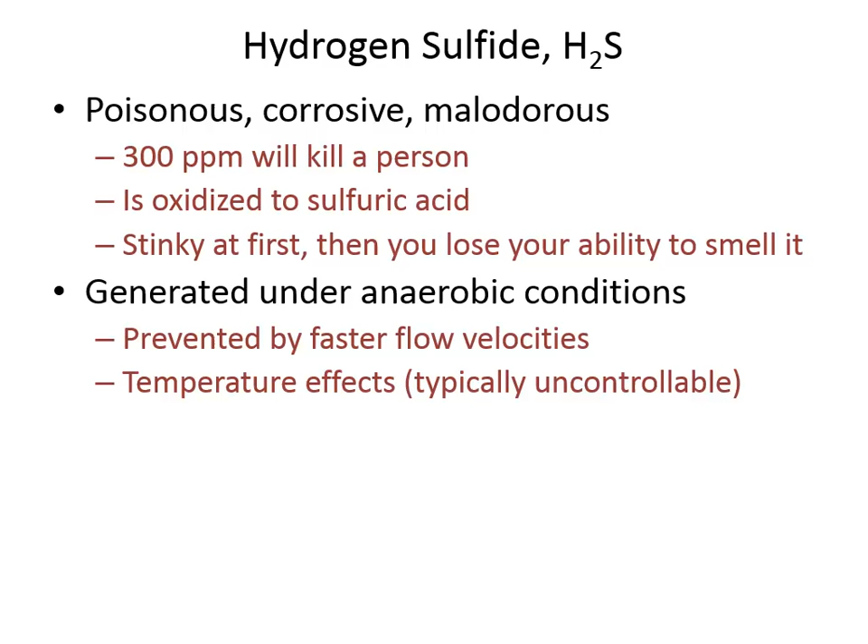People who work in enclosed spaces often have to carry little monitors that will alert them against hydrogen sulfide, but from the hydraulic design standpoint, we want to ensure minimum velocities to help prevent BOD, which is the waste in wastewater, from being converted into hydrogen sulfide. This is an empirical equation that allows you to estimate how much potential for generating hydrogen sulfide there is based on the concentration of waste in the water, and hydraulic parameters like the flow rate, the slope of the channel, and the wetted perimeter to the top width.

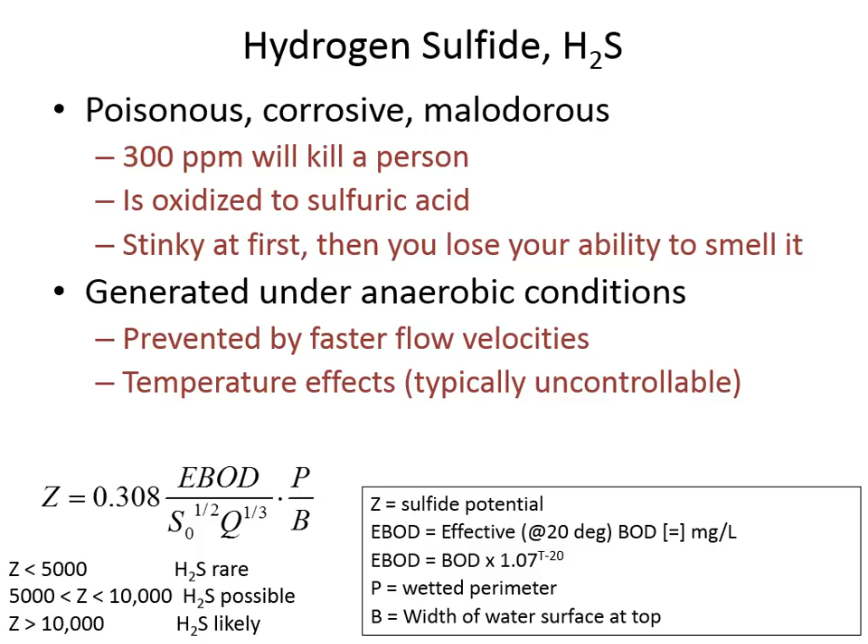According to this empirical model, if you calculate a Z value less than 5,000, then probably hydrogen sulfide won't be formed. At 10,000, it probably will be formed, and there's a middle ground where it's possible, and you just have to be looking out for it. So here's an example that works through both the partially full sewer and the impact of having BOD in there. We'll go through this one quickly so we can save most of the time for channel design.

In this example, we have a pipe diameter of 750 millimeters, and the water has a temperature of 33 degrees Celsius. We care about that for more than just the fluid properties, because the warmer the water is, the more easily bacteria break down BOD and sulfur into hydrogen sulfide. So the temperature is 33 degrees Celsius, and we'll use that in calculating the effective BOD.

The slope, we're told, is 0.8%. And the n value is 0.013; this is a concrete pipe. The slope is 0.008, 0.8 divided by 100. Now, our equation for a partially full pipe says theta to the negative 2/3 power times (theta minus sine of theta) to the 5/3 power, minus 20.16 times n, Q, diameter to the negative 8/3, slope to the negative 1/2 power is equal to 0.

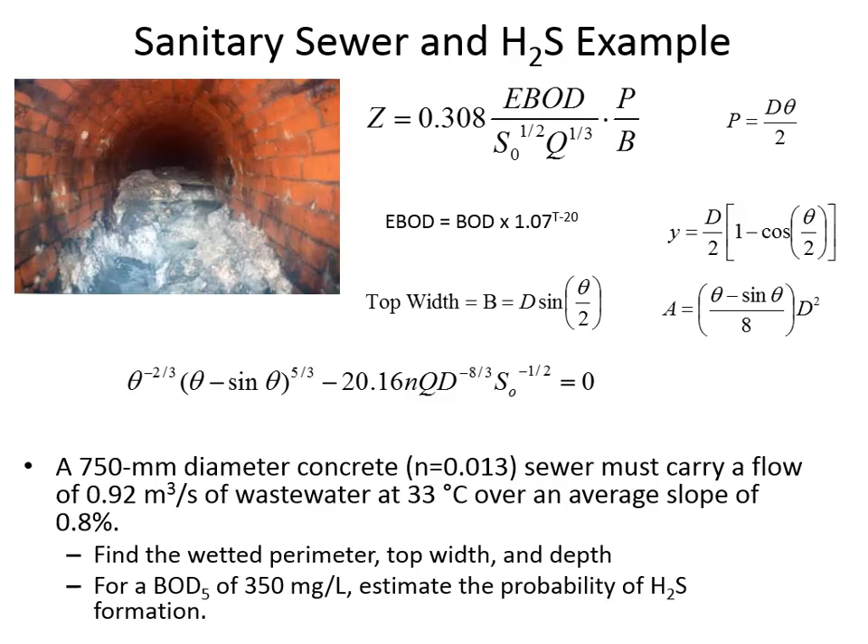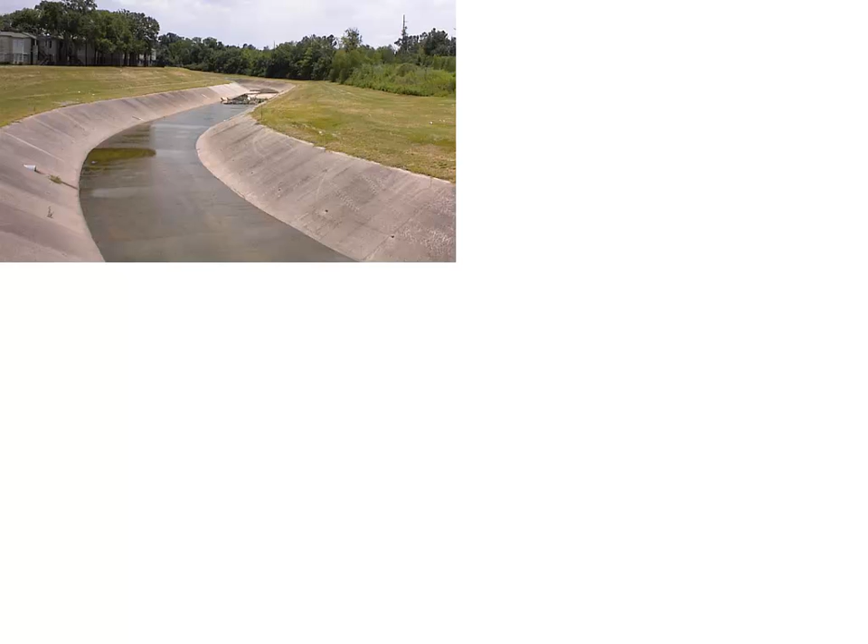All right, well, let's talk about channel design and not probability and risk. I actually took out the probability and risk part of this semester and I put it into hydrology. So in channel design, we'll mostly be, as engineers, sizing lined channels.

Here's a concrete lined channel. You can see it's trapezoidal. This one happens to be meandering in shape. And there's a nice grassy right-of-way on either side of the channel. Those are often put there so that someone could drive along the channel and inspect it, trying to look for any cracks in the concrete or looking for the growth of weeds, because if weeds grow, then they can reduce the hydraulic capacity. So inspection is an important thing, but trying to optimize the capacity of that channel is a big part of what a hydraulic designer would do.

You're trying to balance how expensive it is to excavate, because excavating material and hauling it away is going to cost money. But if you don't go down, then you have to make the channel wider. And of course, you'll notice that this has neighbors in the backyard here. You have to buy land if you make the channel very wide. And so engineering is always about optimizing and balancing costs. And that comes into play with open channel design as well.

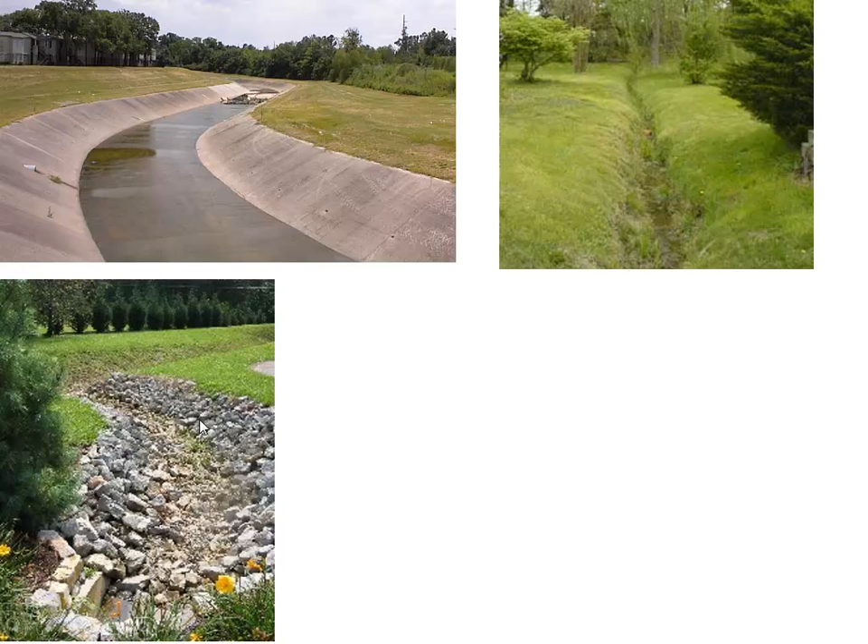Here's an unlined channel. This looks like it's just sort of a ditch in someone's backyard that's formed. It's going to have a much higher n value because of the irregularity of the channel and also because of the grass that's growing in there. Here's a channel that is lined with rocks to try and prevent scour and erosion. This is actually the outfall of a culvert, and it goes around this bend and then enters a grass-lined channel

around that way. And then here they're doing construction on what ultimately will become a plastic-lined channel. This is going to have compacted clay, and then they put down what's called a geomembrane, or a thick layer of plastic to try and prevent water from being lost.

But in constructed channel design, we're trying to consider the slope that's available. You're moving water over the surface from one place to another. Probably the one factor that affects the capacity of the channel more than anything else is how steep it is. And you can't really make the channel any steeper than the slope of the ground. You can make it less steep by meandering back and forth. You can't make it any steeper, otherwise your channel starts to go down underground.

You're trying to balance the effect of the channel geometry on the velocities that can be seen. And velocity is important in the case of hydraulic design of an open channel, because if you have it too fast, then it will scour the bed. And sometimes these are made out of clay and earth, and you want to avoid the scour of the bed. But if it's too low, then sediment may drop out of the flow and start to line the bottom of the channel, or weeds can form.

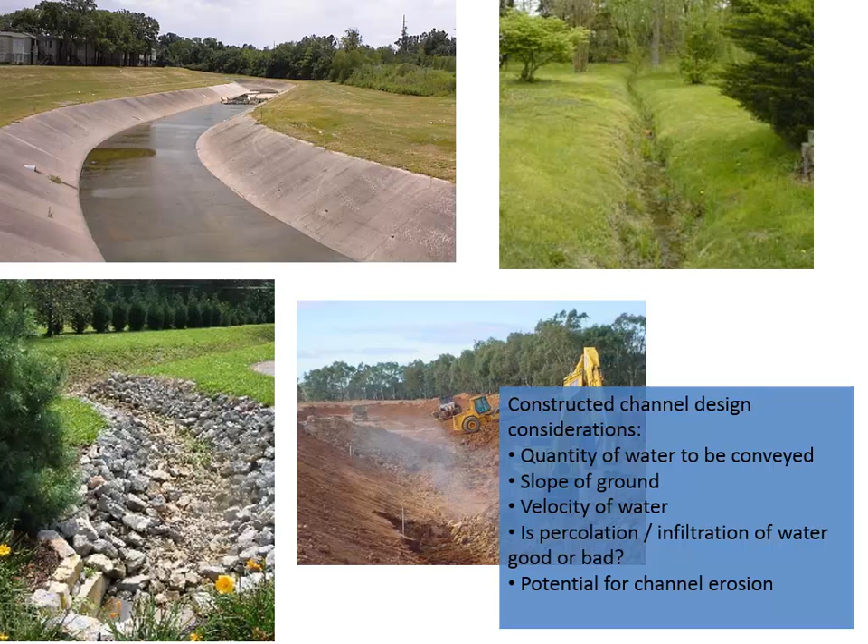But in other cases, like in Arizona, where they have a 100+ mile channel that takes water from the mountains into Phoenix, infiltration is really a big problem. They don't want water seeping from their channel. They want as much of it to be conveyed to the city as possible. So we'll step through some of these considerations.

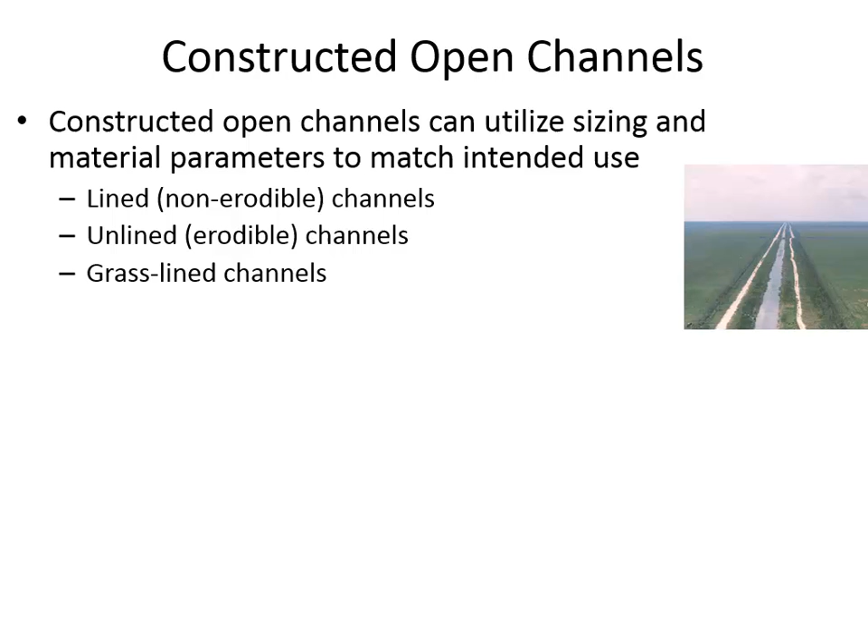And in open channels, we can have lined, unlined, and grass-lined channels. By lined, we usually mean with concrete, or sometimes paved with asphalt. For erodible channels, most commonly what we're working with is a clay, a compacted clay, and a grass-lined channel is kind of in between. It provides some resistance against scour, but ultimately not as much as a lined channel would.

We've already talked about the sections that are the most hydraulically effective, those that can maximize the amount of water that flows through them while minimizing flow area. Because by minimizing flow area, you're reducing the amount that has to be excavated and hauled away, and you're also reducing the amount of liner that has to be installed.

Yep, that's Florida. Yeah. They've got a lot of really long, straight canals down there to help drain swamps and increase the availability to develop land.

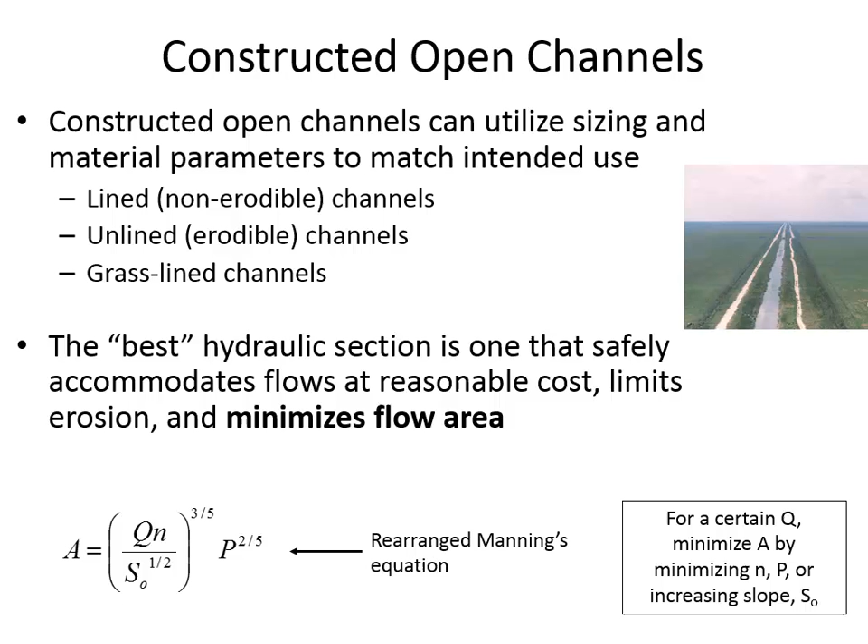26 miles, yeah, that's long. I bet it was hot too, right? Oh, okay. Well, I don't feel so bad for you then.

There's something called superelevation. If you had a tight radius curve, like this is our trapezoidal cross section, and the water is going around a bend like this, then the surface may actually be tilted like that as it goes around the bend. If the velocities are high, it's going to be more pronounced than if the velocities are low. One of the reasons you put a little extra height above where you expect the water surface to be is for superelevation around a curve.

It may be because of splashing. It could be that there's going to be a hydraulic jump in the channel with a lot of vigorous mixing, and so freeboard considerations take that into account.

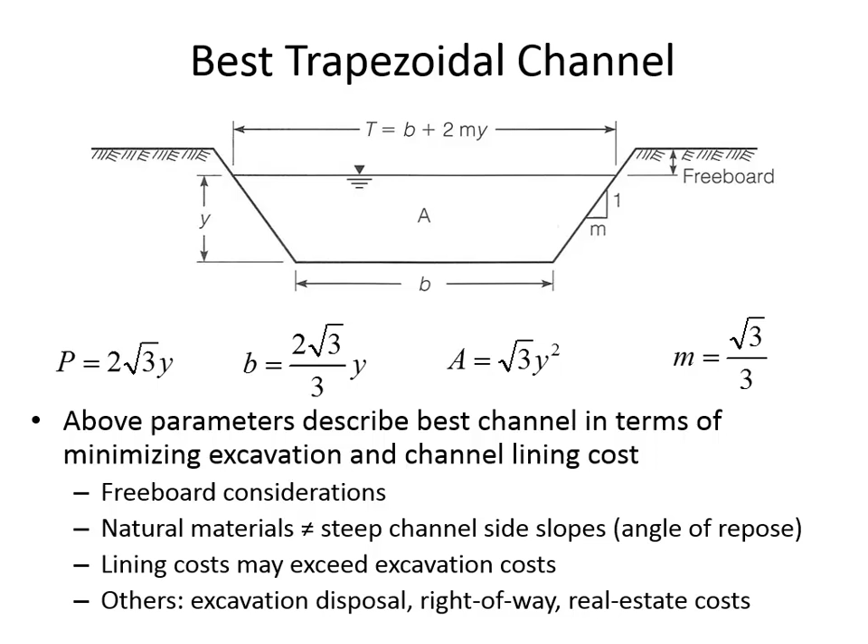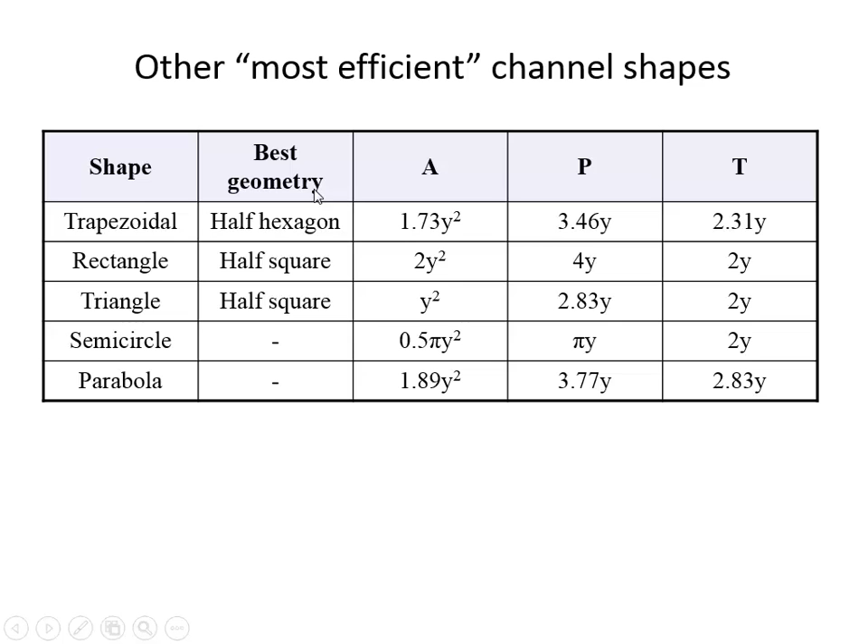So freeboard varies based on the quantity of water you expect to carry, and also the width of the channel is going to affect the superelevation. But here are some of the geometric parameters for what's considered the best geometry, best in terms of minimizing the flow area, A, based on a certain depth, Y.

Now, there's a couple of different slopes. We talk about the side slopes, and we've already talked about how the side slope factors into calculating the cross-sectional area. But how steep you can go with a side slope depends on what the channel is going to be made out of.

If you're going to have a channel built out of rock, then you could actually have a vertical side slope. You can get away with the rectangular channel that we're always using in our calculations just because it's numerically easier. You wouldn't be able to get away with a rectangular channel if you're digging into sand, right? A sand channel isn't going to have this sharp edge, but you could if you had concrete or rock. So the side slopes you select are governed by how cohesive the material is.

The longitudinal slopes are just governed by the surrounding geography. If you're in a flat area, your longitudinal slopes are going to be relatively mild, like that picture of Florida. Florida is not a very hilly state, so their channels are very, very flat. Steep slopes may cause channel erosion, and that can be prevented with meandering. If you have a hill, the channel can wind back and forth, and by doing so you have a more moderate slope than if you went straight down.

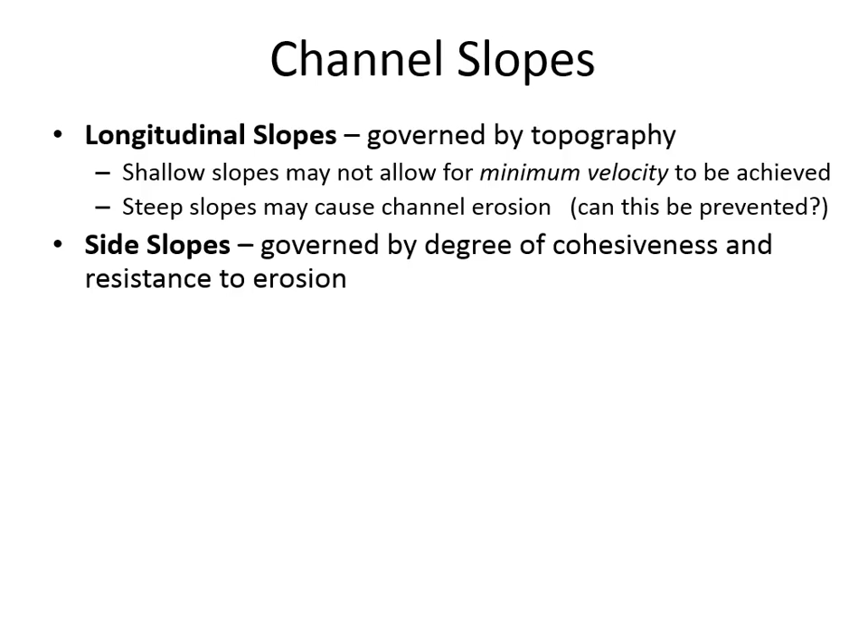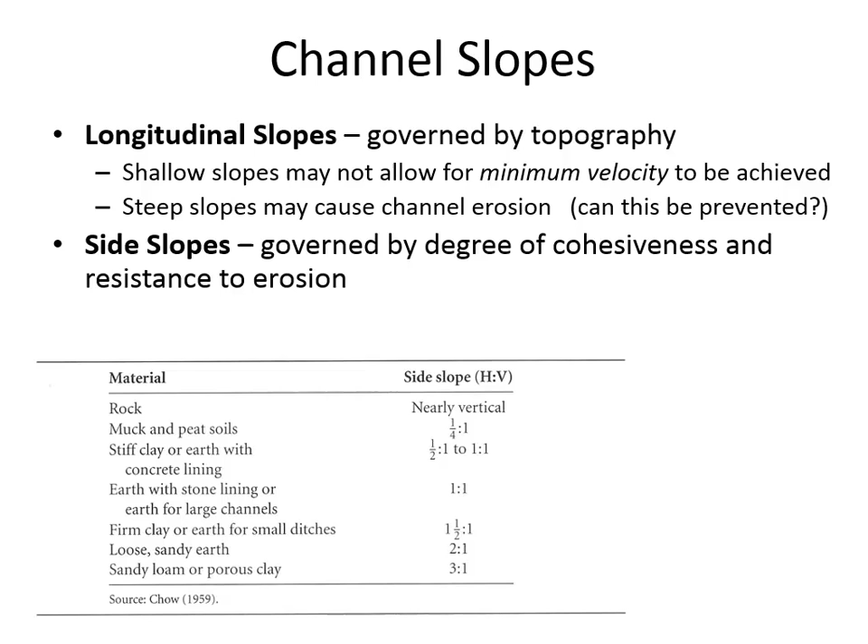Here are some typical side slopes that can be tolerated in a variety of different materials. You'll notice that if you've got sandy materials, maybe the best you can do is a 3-to-1 side slope, whereas with rock, you may be able to have a vertical side slope. And there's a variety of side slopes in between depending on the material being used.

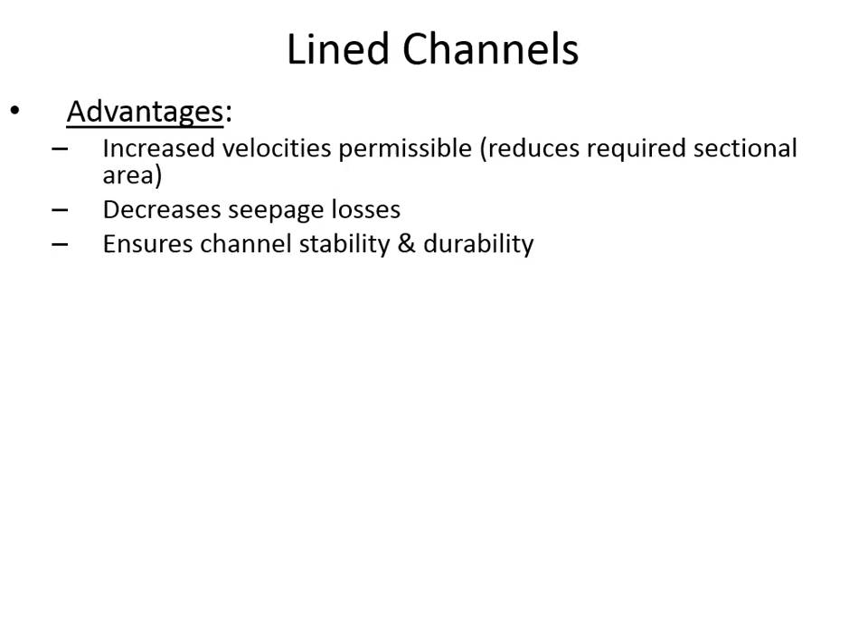If water's going down the mountain in a straight line path, you're going to have to line the channel with concrete to try and make it more resistant to scour because the velocities are going to be very high. Another advantage of using a lined channel is that generally that decreases the amount of lost water due to seepage. So if water is considered a precious resource and you don't want to lose it, then a lined channel enables you to avoid that. On the other hand, the unlined channel is good if you're using water as a waste. If you're trying to get rid of storm water, then an unlined channel is better from that perspective.

To design a lined channel, you first start off with selecting the material and the flow rate that has to be carried. Selecting the material is often just a function of talking to the material resource providers in the area, the people who provide concrete, or it might be that you have access to a geosynthetic liner, like a plastic liner that could go on top of a clay section. And then you find the n value for that material.

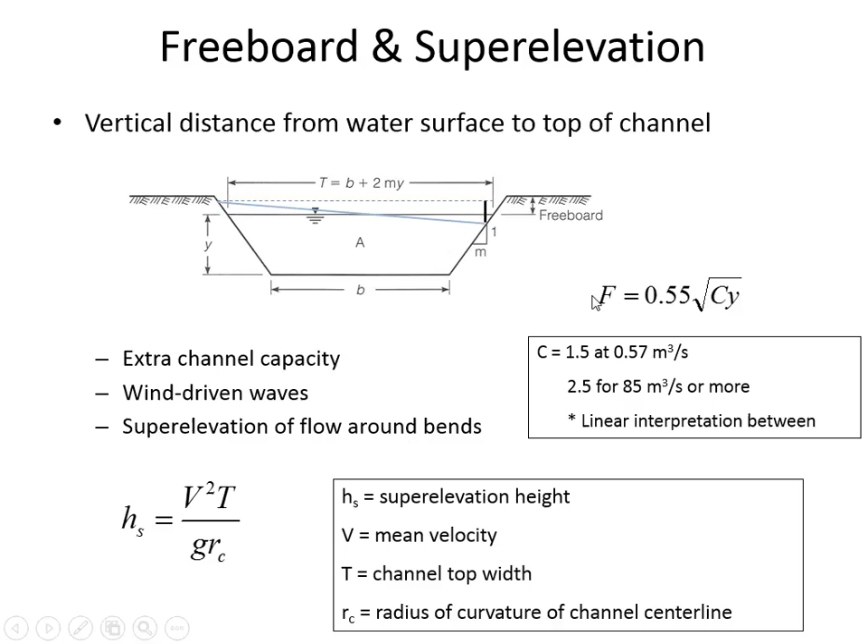The flow rate to be carried would be given to you by the hydrologist, saying what the flow rate is coming out of a canyon where you're trying to convey the water from place to place, or it might be that you're conveying water to a water treatment plant, in which case the flow rate is maybe dictated by the demands of the water treatment plant. The n value is related to the material. The freeboard coefficient would be selected based on this interpolation and the calculation for how much extra capacity over and above the water surface for freeboard.

Computing normal depth of flow from Manning's equation is how we find the depth. And then you check the velocity and the Froude number. And the reason why is that typically you want to avoid supercritical flow if you can, because it's prone to scour, and if you get supercritical flow at a certain section, then it's going to have to go through a hydraulic jump when it transitions to subcritical flow. So you want to avoid supercritical flow.

Even though hydraulic jumps are fun to look at, they can be a little bit unpredictable and risky if you have one and you don't know exactly where the jump is going to set up, and you're not prepared for it. It can cause problems.

The rule of thumb is that if you've got a non-reinforced lining, you want to have the flow rate under 2.1 meters per second. So non-reinforced would mean like if you have concrete, but it's not heavily armored concrete. But if you have a channel that is going to have really high velocities, you can have up to 5.5 meters per second if you've got a reinforced lining.

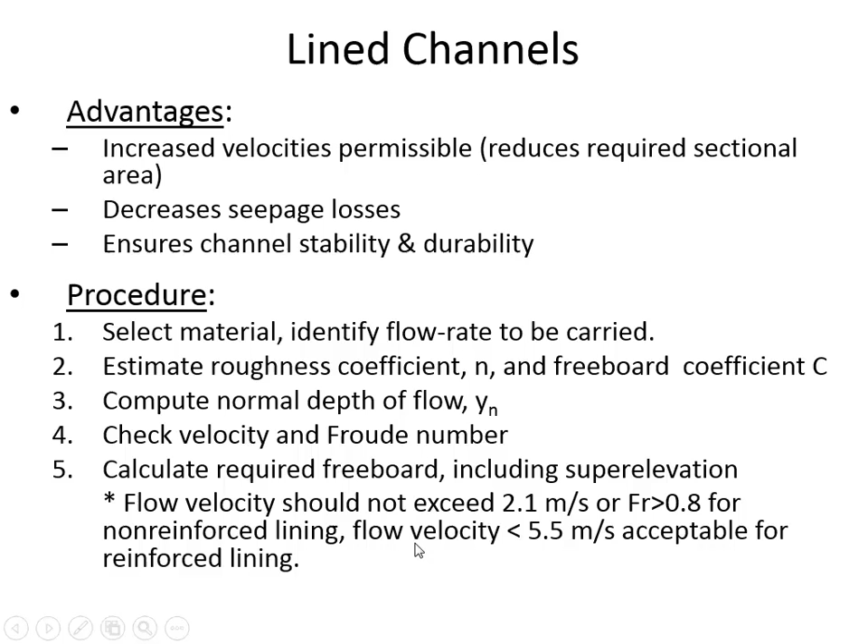All right, so here's an example that takes us through the process of designing a reinforced concrete trapezoidal channel.

Is there an extra copy of the notes? Got 15 minutes, and I want to leave you about 7 to do the teaching evaluations, so I think we'll be okay.

Okay, we're going to design a lined channel here to carry 2.4 cubic meters per second. So first of all, step 1, we're going to use concrete. And the n value of this concrete, let's just say we're going to pick in the middle of the typical values for its roughness. 0.015 would be a little bit more rough than the standard 0.013 that we sometimes select. We know that the flow rate to be carried is 2.4 cubic meters per second, and the channel slope is 0.005 in this example, so 0.5% slope.

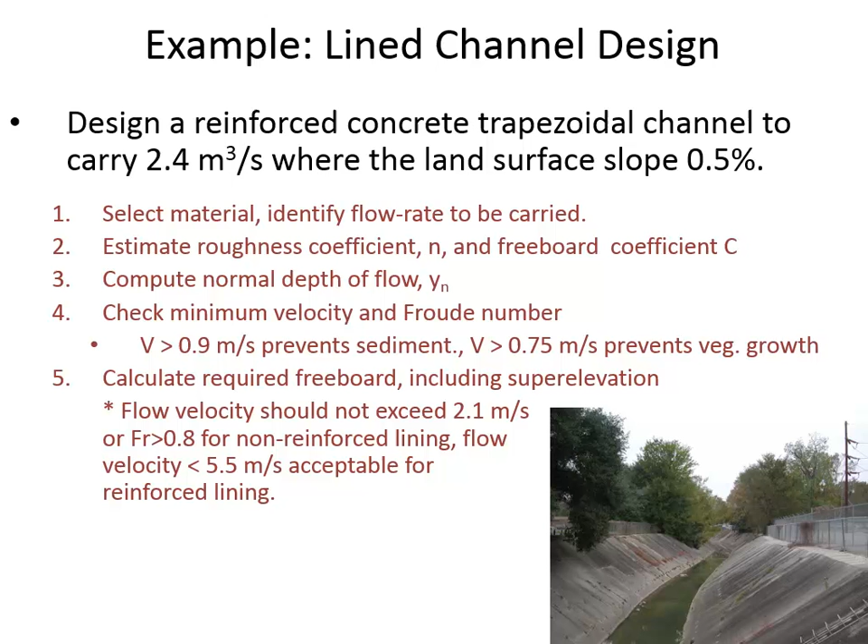All right. Let's leave that example here because I just want to show you one other concept and then we will call it a day. We'll call it a semester. Well, the final exam, we'll call it a semester. We'll call it a class.

In an unlined channel, you have to go through and compare the shear stress that's applied to the channel surface with the cohesive strength of the soil. And so if you don't have concrete there, the question is if water is flowing over earth, is the shear stress of the water going to disrupt the earth, or is the earth holding together with enough strength that it won't be scoured? And what this graph shows you is for the particle size in inches and the angularity of the soil, what a typical angle of repose is. An angle of repose is if you're starting to make a stack of some material, what the angle with the horizontal would be.

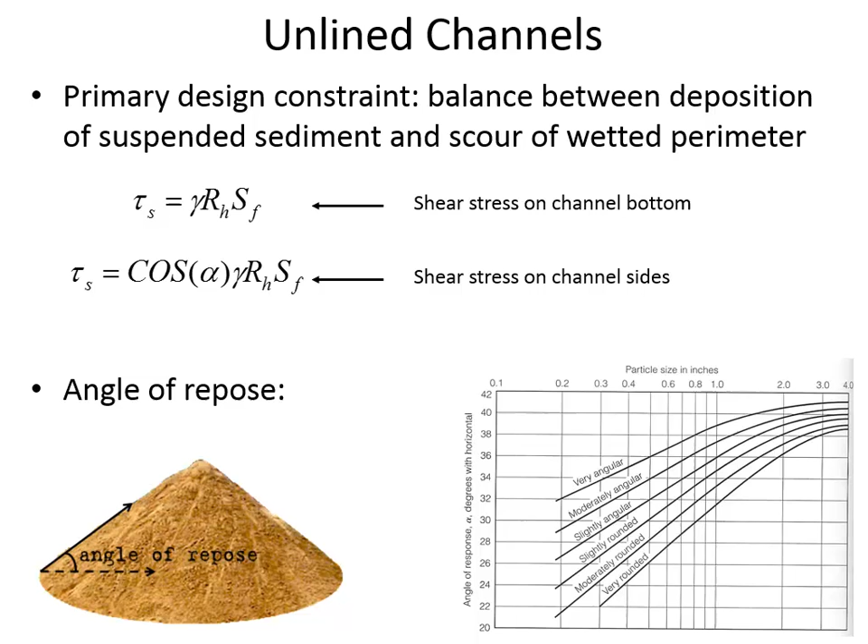And so you can calculate the shear stress on the bottom of the channel by the slope of the energy grade line, the hydraulic radius, and the unit weight of the fluid that is being transported in the channel. And so what you would do in an analysis like this, if you've got an unlined channel, is you would use this expression to calculate the shear stress, and then you'd go through a soil analysis and try and find out what's the cohesive strength of the soil. So the hydraulic engineer would just get an answer from the geotechnical engineers, what's the shear strength of the soil.

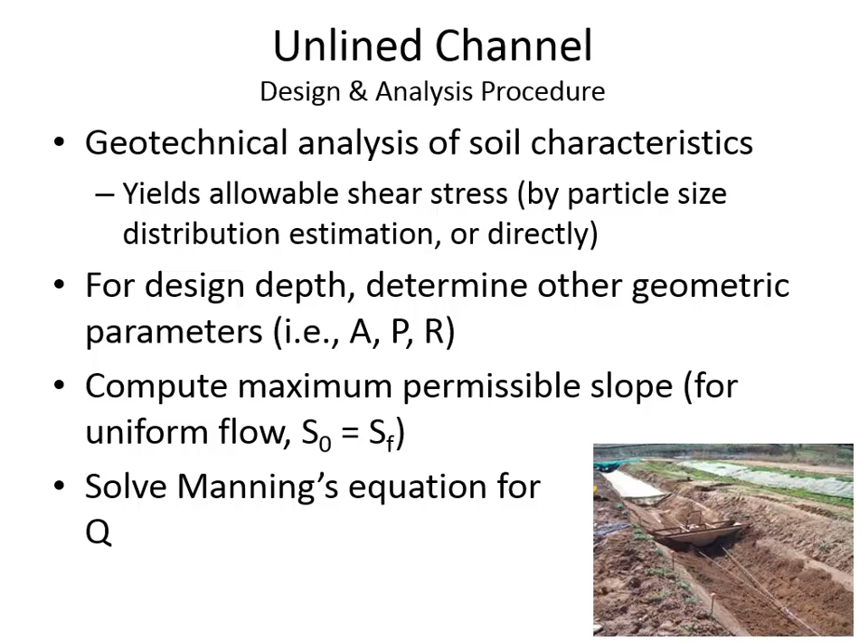The design procedure has some similarities to what we do when we have a lined channel, except that we're going to want to have much lower velocities than we would in the case of a lined channel, because the concrete was able to resist a lot more scour than an unlined channel will. Okay, so that is where we're going to leave it for now.